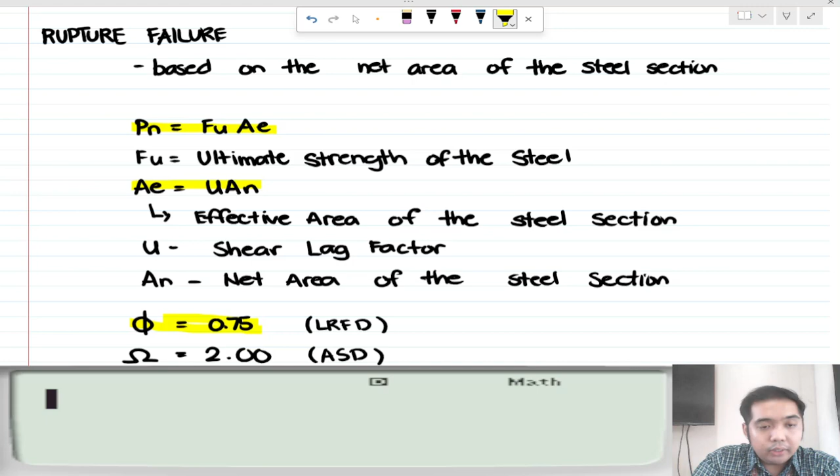This is for our ASD, or allowable stress design. So for rupture failure, our phi or reduction factor is 0.75. Remember that. And our factor of safety or omega is 2. It's important that you remember that.

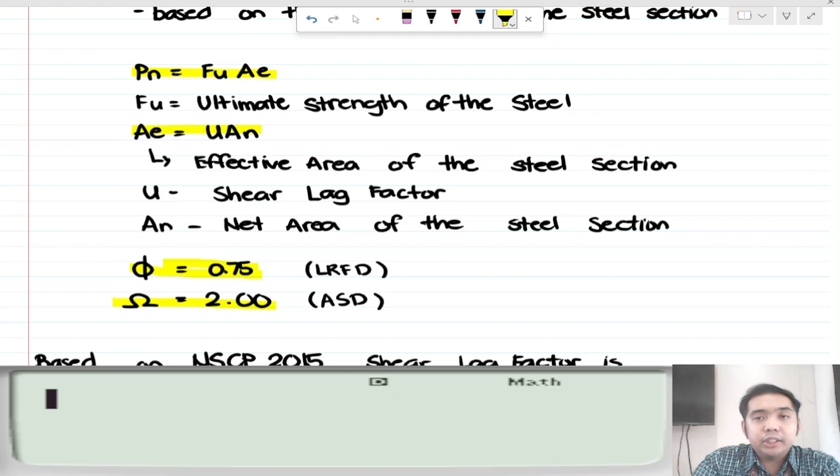So how do we solve or determine our shear lag factor? Based on NSCP 2015, shear lag factor is determined by referring to table 504.3.1. So this is our table 504.3.1. These are the cases where we can know what shear lag factor U to use.

For case 1, all tension members where the tension load is transmitted directly to each of the cross-sectional elements by fastener or welds, except cases 3, 4, 5, and 6. So our shear lag factor there is 1.

For all tension members except plates and HSS where tension load is transmitted to some but not all of the cross-sectional elements by fastener or longitudinal welds, our shear lag factor becomes 1 minus x bar over L, wherein x bar is the connection eccentricity in millimeters and L is the length of the connection in millimeters. This means there's a weld or fastener on one section of the steel but not on all sections.

For example, in this case, there's a connection on the web but not on the flange, or there's a connection on the flange but not on the web. And then, all tension members where the tension load is transmitted by transverse weld to some but not all of the cross-section elements.

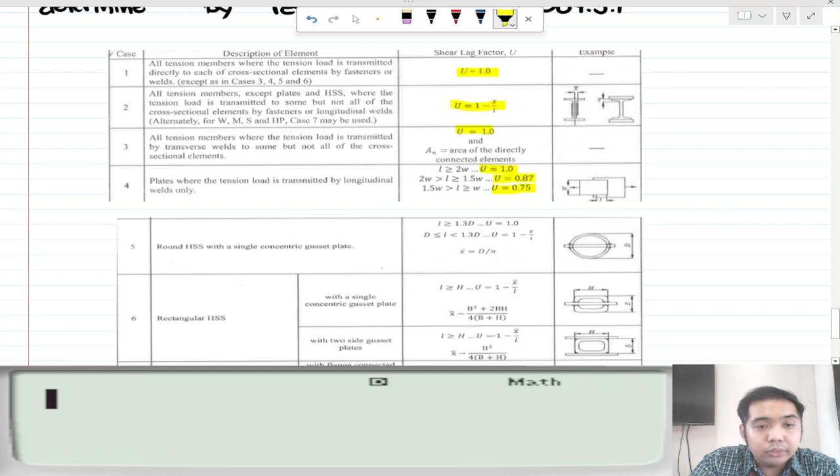And then, case number 5, round HSS with a single concentric gusset plate. There are also conditions here, like when L is greater than or equal to 1.3 times the diameter, our U becomes 1.

And when the diameter is less than or equal to the length, but the length is less than 1.3D, our U is 1 minus x bar over L, wherein x bar is diameter over pi.

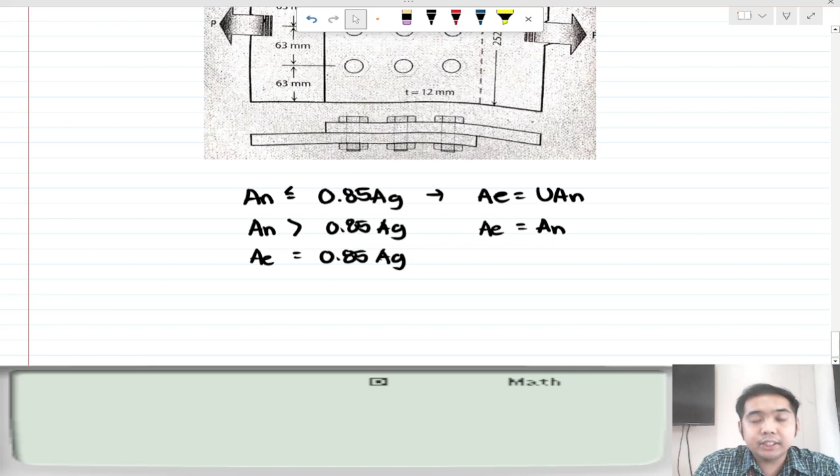Ngayon, pagdating sa mga bolts, ima-minus natin yung area na nakain ng bolts natin. Kapag given ang diameter ng bolts based on NSCP 2015 or 2010, pinaplasan natin ng 4 mm yung diameter ng bolt. So bakit tayo nagpa-plus ng 4 mm? Kasi yung given sa atin is diameter pa ng bolt, so kapag nilagyan natin siya ng bolt, dapat may allowance tayo dun sa bolt.

Kumbaga, ang gagawin natin, paplasan muna natin ng 2 mm yung bolt diameter para maging nominal hole diameter yung ating hole. Tapos paplasan pa natin ng 2 para siya ay maging effective diameter ng hole natin.

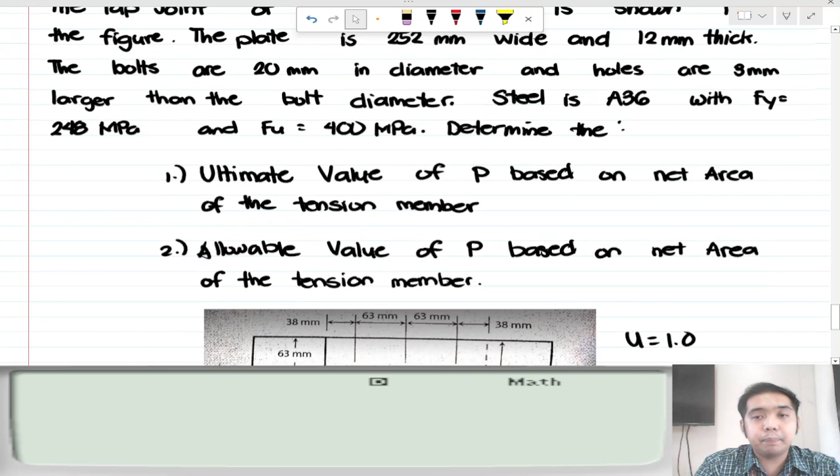Pero dito sa problem natin, binigay na yung effective diameter ng holes. Sabi dito, yung holes natin is 3 mm larger than the bolt diameter. So dito sa case natin, binigay na yung effective hole diameter, which is 3 mm larger than the bolt diameter. Kaya ang gagamitin ko muna dito is itong 3 mm, imbis na 4 mm na nakalagay dun sa ating NSCP 2015 o 2010.

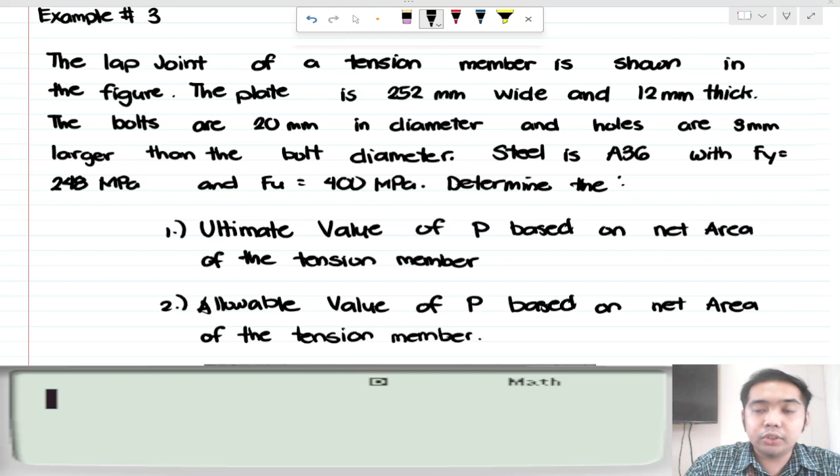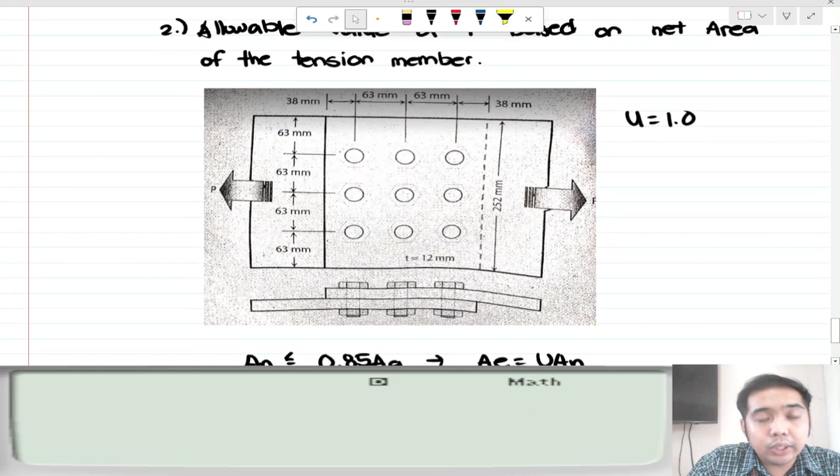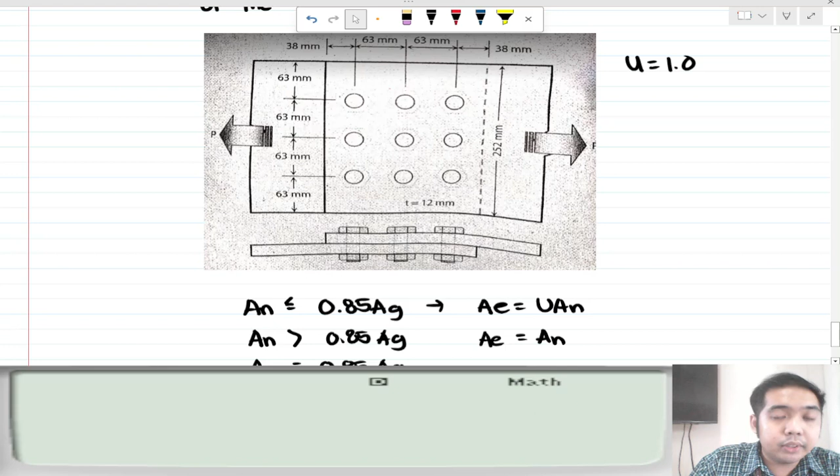So pwede ko na makuha dito yung ating net area. Pagka kumuha ako ng net area, AN is equal sa AG muna, gross area. So gross area natin is 252 times 12, minus, maminusan natin yung ating gross area ng, kung makikita nyo dito sa ating figure, may tatlong hole na babawasin tayo dun sa section ng ating steel. Tatlong hole yung sinakop ng diameter ng bolt dun sa section ng ating steel.

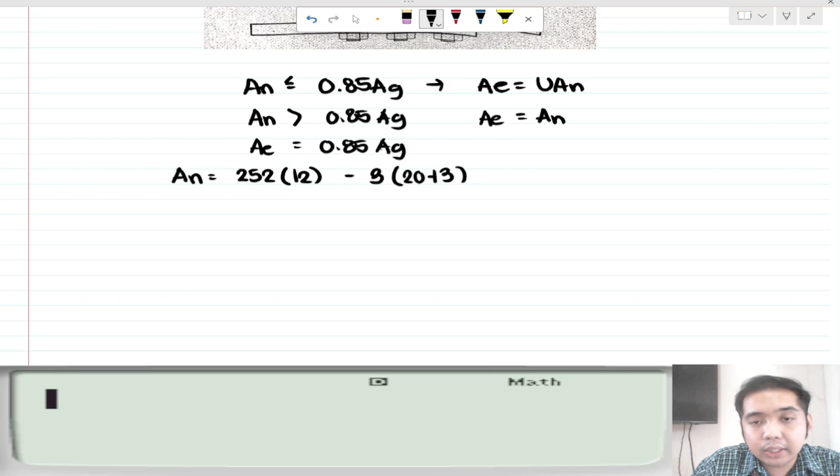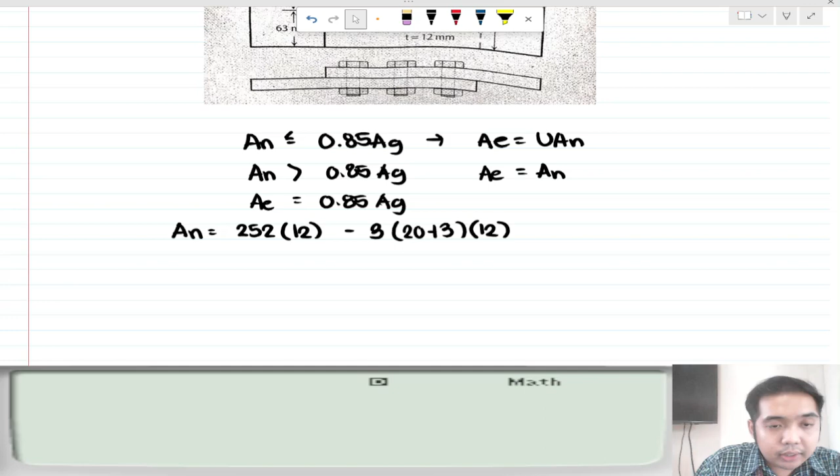So maminusan ko yan ng tatlo times yung diameter ng ating bolt, 20, paplasan ko ng 3 kasi kailangan natin gawin siyang effective hole diameter. And then, tatimesan ko siya ng thickness din na 12. Yan na yung ating magiging net area. Ang magiging net area natin dyan, atin pong i-evaluate.

252 times 12 minus tatlong diameter ng hole times yung thickness ng hole na 12 din. Ang atin pong magiging net area dyan is 2,196 mm squared.

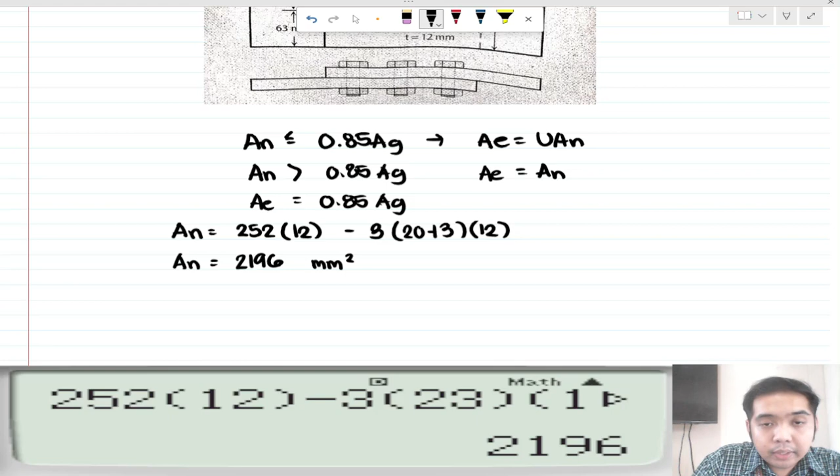Ngayon, kailangan muna natin i-check yung 0.85 AG kasi baka mamaya mas malaki itong AN natin dun sa 0.85 AG natin. So, 0.85 times 252 times 12, yun pong ating 0.85 AG is equal sa 2,570.4. So ito ay greater than AN, meaning, therefore, yung atin pong AE is equal sa AN.

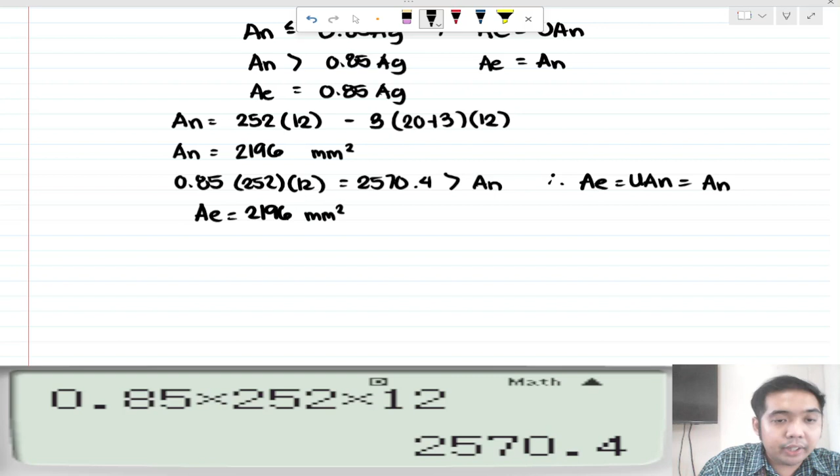Meaning yung AE po natin is equal sa 2,196 mm squared. Meron na tayong AE, binigyan tayo ng FU kanina, which is 400 megapascal. So all set na po tayo, makakakuha na tayo ng nominal load. Nominal load is equal sa FU times AE, equals po yan sa 400 times 2,196. O-overrun lang natin ang 1,000 para maging kilonewton. So ang atin pong nominal load is equal sa 400 times 2,196 over 1,000, which is 878.4 kilonewton.

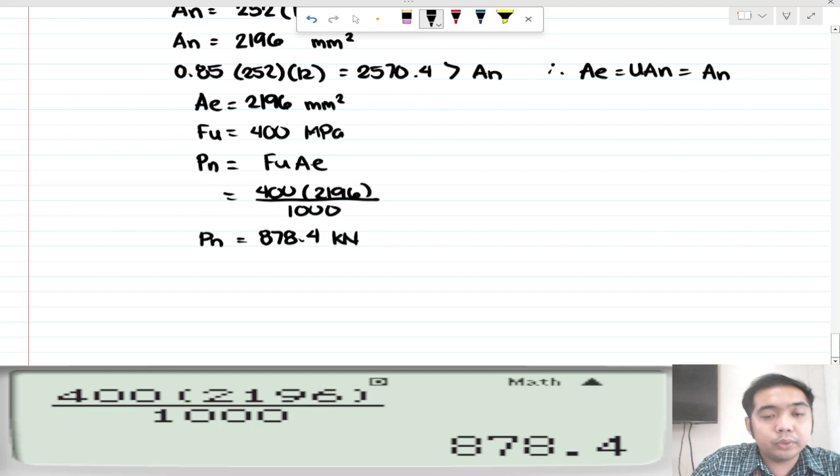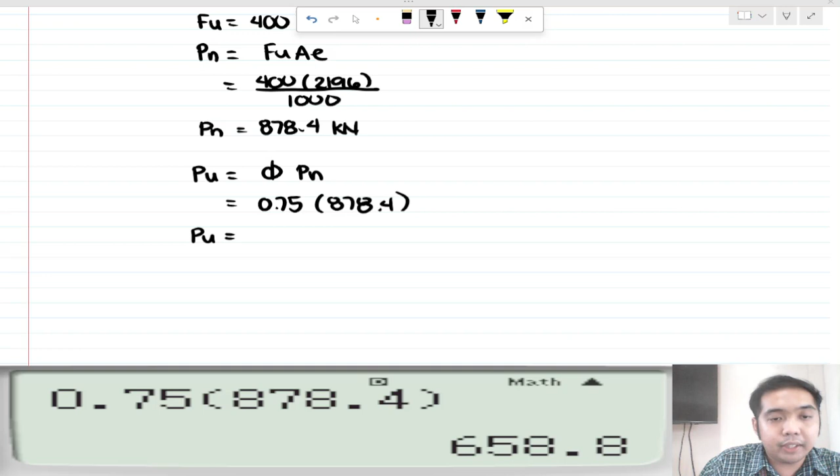At saka, pwede na tayong kumuha ng ating design capacity o design value of P based on net area. So yun ay PU. PU is equal sa Phi PN. We all know that yung Phi natin dito sa ating fracture failure is 0.75. So tatimsan lang natin ang nominal load na 878.4. Ang atin pong design value of P is equal sa 0.75 times 878.4, so yan ang ating ultimate value of P based on net area is 658.8 kilonewtons. Yan yung ating magiging final answer for number 1.

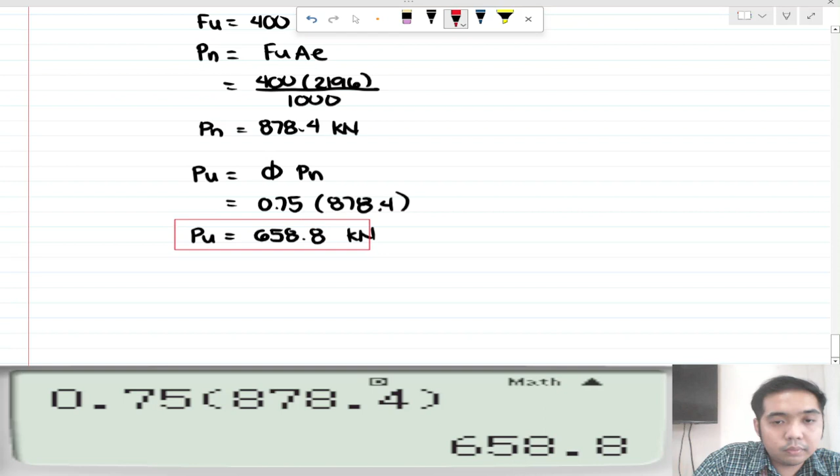Then next, for number 2, ang hinahanap naman doon is yung allowable value of P based on net area. So yun ay Pn over omega. Wherein yung ating Pn is 878.4 over yung ating omega na 2.00. So ang magiging allowable value of P based on net area is equal sa 878.4 divided by 2. Yung atin pong allowable load is 439.2 kilonewton.

At ito yung ating magiging final answer for question number 2 para sa ating example number 3. So easy, okay?

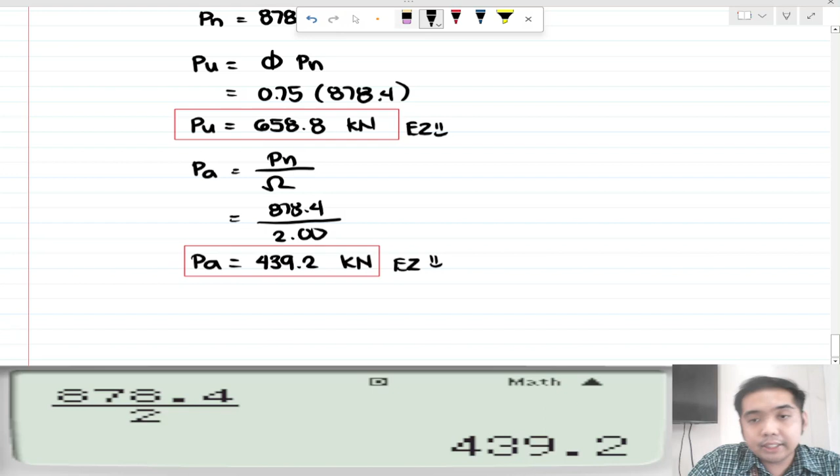So, again, let's answer another example for this limit state.